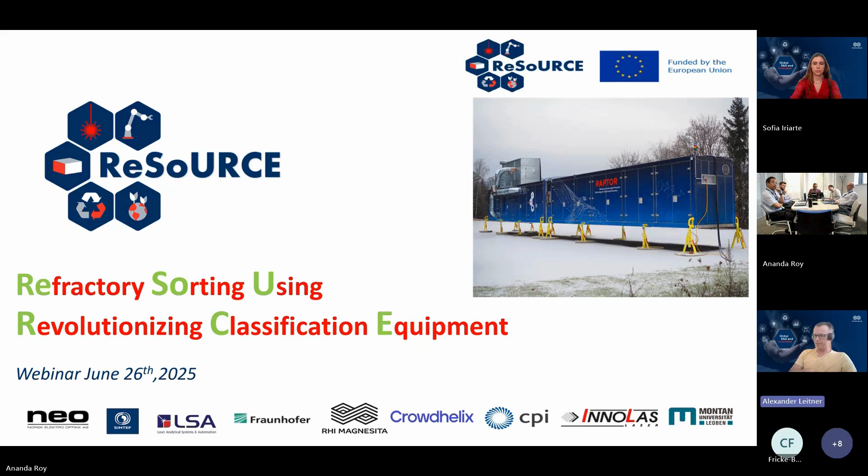Just as a basic idea, what you will gain, we will start with an introduction here. At first, a little bit on refractories themselves, so that you also understand what's actually the origin of the material we are talking about. I would like to show you a little bit the sustainability perspective of how this is impacting society at the end of the day.

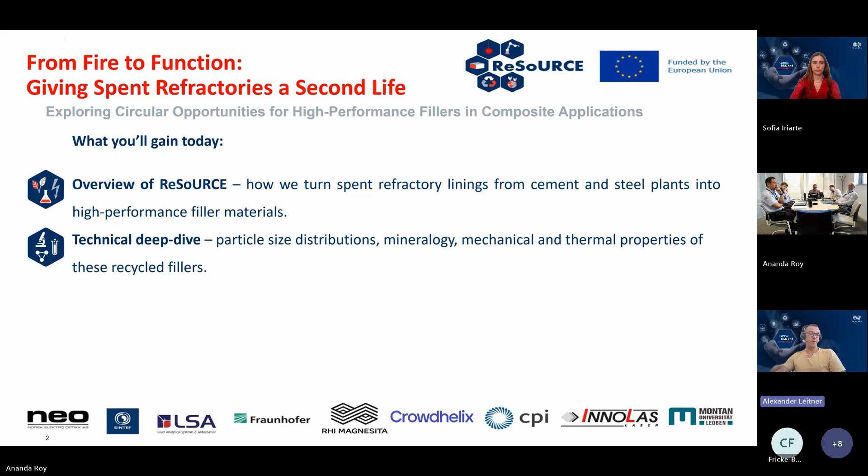Then when we go on, next part will then be done as mentioned by CPI. We will talk a little bit about materials, what are their properties and how have they been characterized. And they will also outline a little bit possible applications we have here within that. So all of that should at the end really serve as a base for potential collaborations.

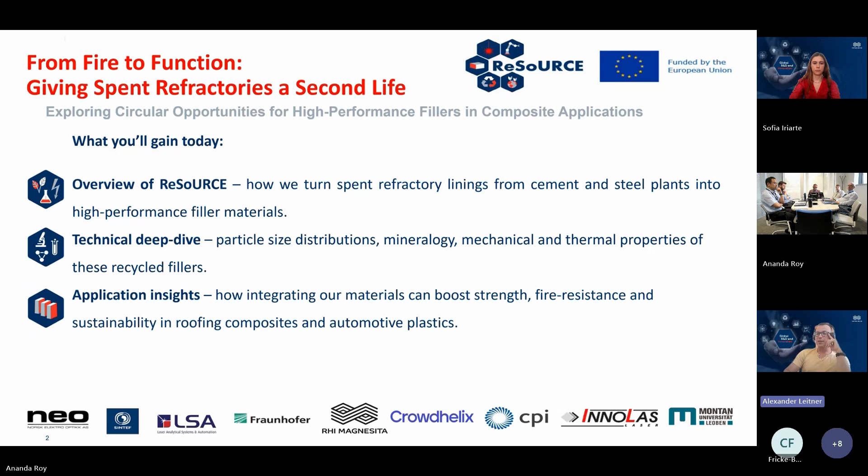But now I think we would like to start with a short interactive session. So we have prepared here a short Menti where we would like to get a little bit deeper into the field of refractories themselves. On the next slide, you are going to see there the QR code, and I'm going to take over control here. There will be 10 questions, I think, and yeah, there will be a small surprise prize also for the winner.

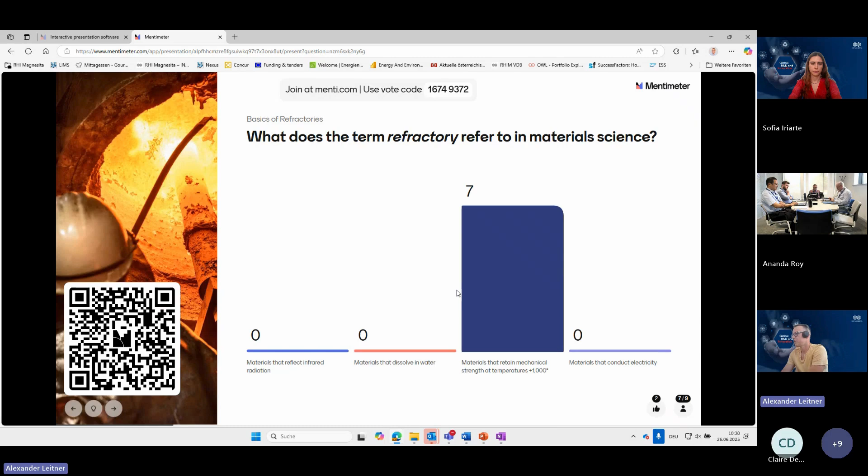Good, then we are going to move on with the next question: which of the following is a critical requirement for a material to qualify as refractory? Is it lightweight structure and UV stability? Is it high electrical conductivity? Is it transparency and low melting point? Or is it the ability to maintain thermal stability and chemical resistance under extreme conditions and temperatures?

So we've now hidden the answer, so it might get a bit harder, not just people selecting the same thing. Let us see what's the correct answer here. It's the ability to maintain thermal stability and chemical resistance under extreme temperature, right? So it's not only about the melting point itself, it also needs to really fit to the customer process, because otherwise it will not serve the purpose of protecting the customer's aggregate against the media which is processed in there.

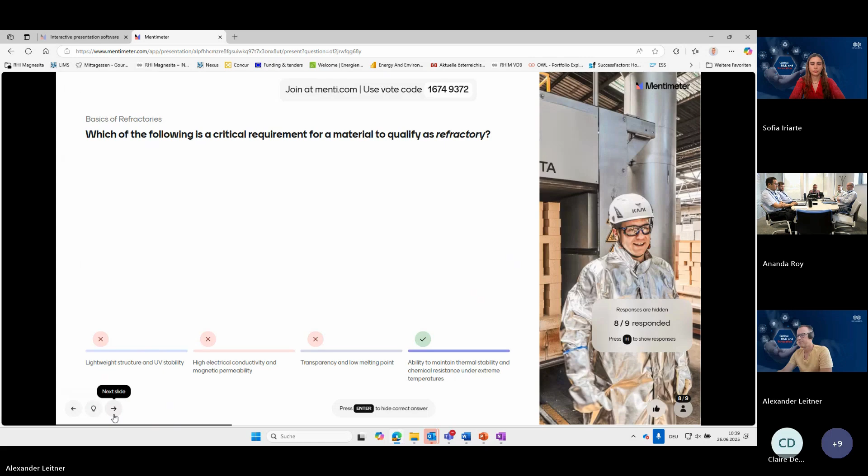Next question: Which of the following materials is not typically used in refractory production? Is it silica, alumina, magnesia, or polyvinyl chloride?

We have 7 answers. Let's see the responses. Two are saying silica, which is not the case. Actually, polyvinyl chloride is the one which cannot resist high temperatures.

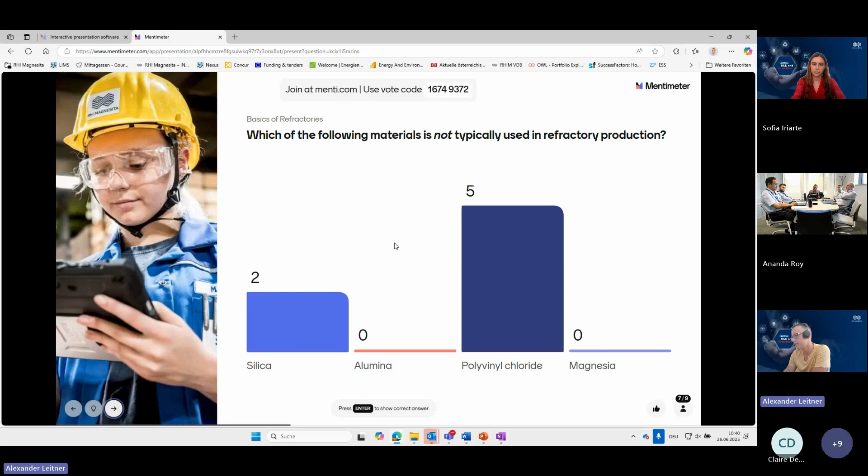Next question: In which of the following industries are refractory materials critical? Is it steel, cement, glass, non-ferrous metallurgy, waste incineration, chemical industry? Or does this rather belong to data centers, wind energy and air conditioning, or to food packaging, agriculture and carbon fiber production, or textile dyeing, petrochemical refining, or furniture coating?

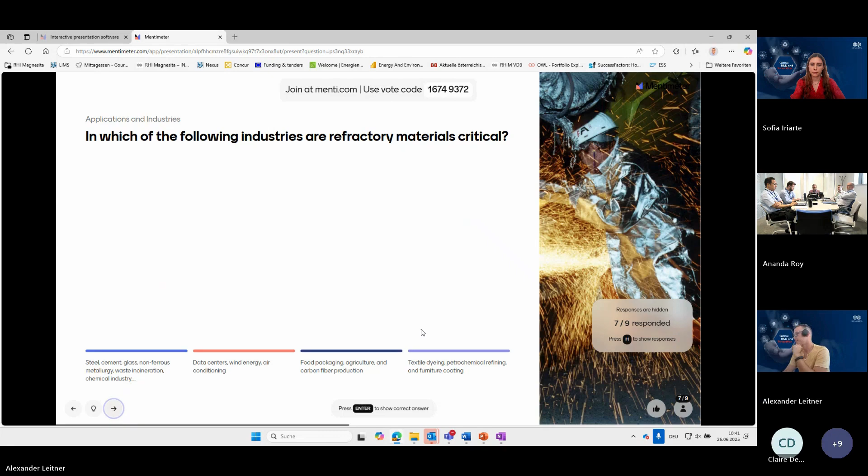People are really quick now. We can see all of you guessed right. It's really related to material production where very high temperatures are used.

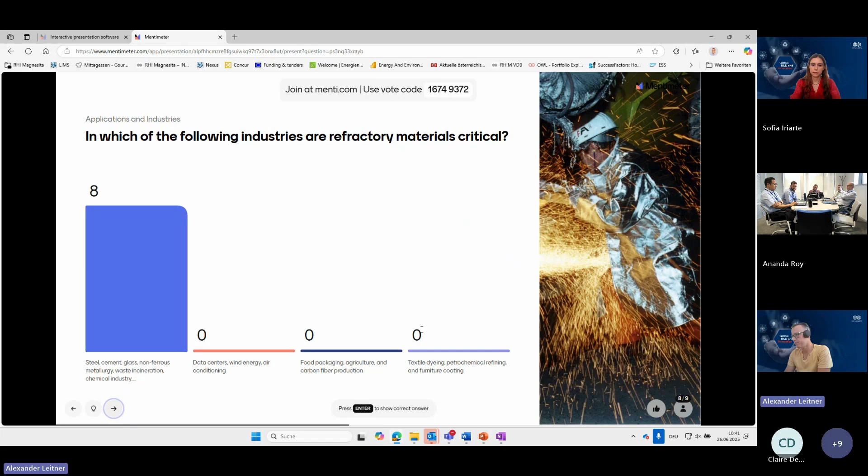Now getting a bit closer to sustainability. What do you think is the average CO2 emission per 1 ton of refractory product produced by RHI Magnesita? Is it 0.16 tons, 1.6 tons, 0.06 tons, or 6.1 tons?

As a reference, the average CO2 footprint of a citizen in Europe is roughly 6 tons per year.

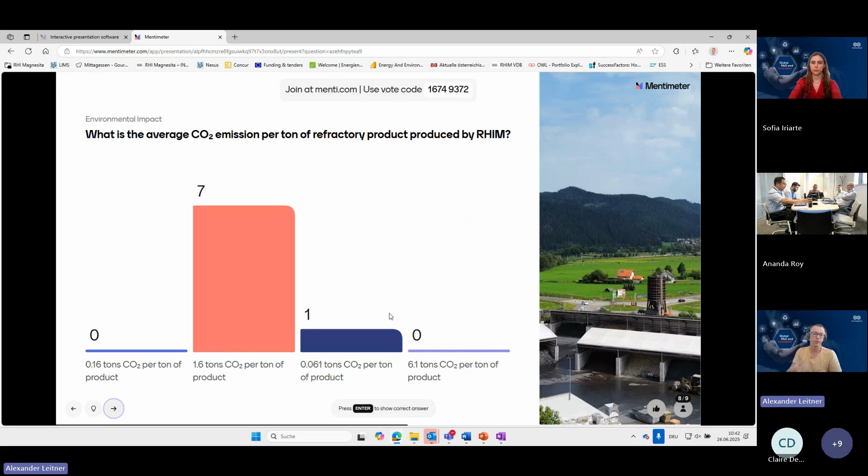We need some more answers. Let's see what's the choice here. That's correct - 7 people chose 1.6 tons per ton of refractory product. So please consider that we are actually producing, in terms of mass, more CO2 than we produce refractory material to be used afterward. This is quite a significant impact.

So where does this come from, why do we have such a large impact? Is the main impact coming from water used during shaping and drying of materials? Is it local transportation from warehouse and raw materials to customer and manufacturing facilities? Are these the fossil fuels used in production? Or is it actually the raw material and the processing, called calcination itself?

We have the responses coming in. That's probably a not-so-known fact - we do use a lot of fossil fuels and need to produce our materials at high temperatures, but indeed, it's actually the calcination of the raw materials.

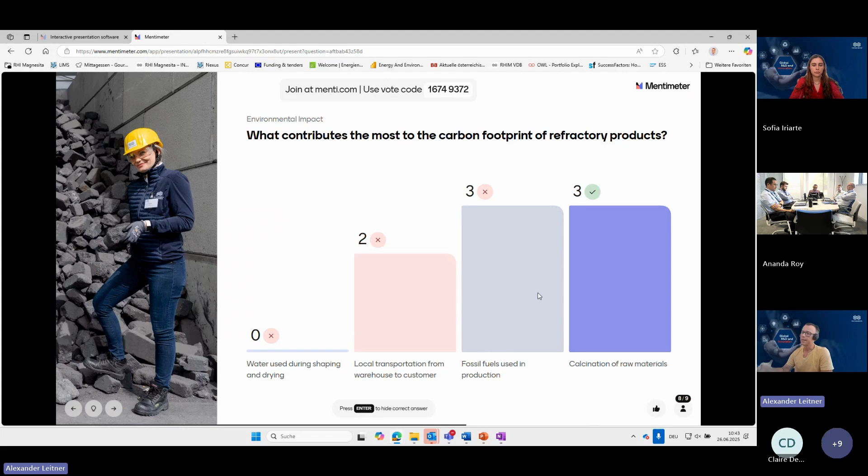That means we usually have carbonates as a raw material, which has intrinsic CO2 stored. So we really have a raw material topic here regarding sustainability.

Two more questions. How much recycling is used in refractory products at the global scale - not just for RHI Magnesita, but globally? Are we using 60% in our products? Are we using 3 to 5%? Are we using around 80%? Or are we using less than 1%?

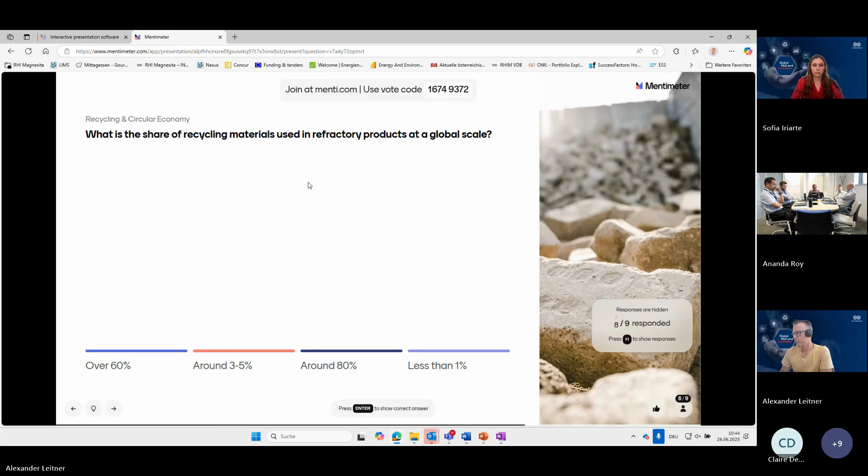Unfortunately, it's not over 60% - that has different reasons which I'll explain a bit later. The correct answer is that on a global scale, only 3 to 5% of this material is recycled, even though it has such a high carbon footprint.

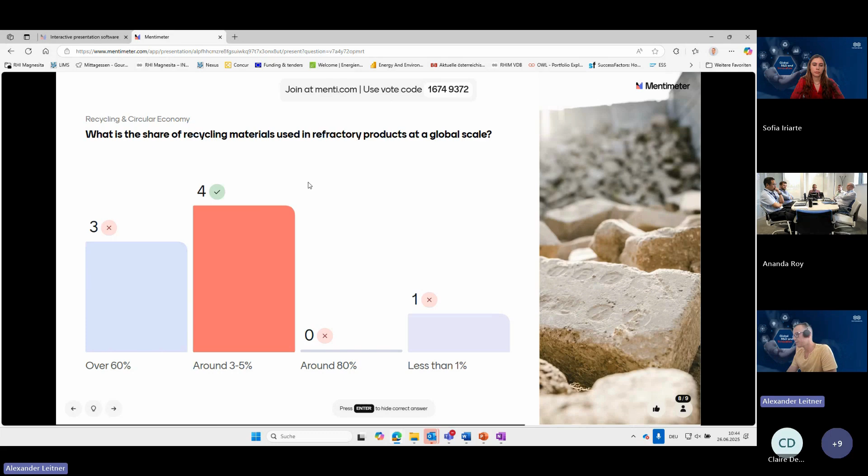At RHI Magnesita, we are very proud that we have a recycling rate close to 15%, so we are really a front runner in this field. However, it's quite challenging to further increase this number, which is something I'd like to show you in the next few slides.

To get an idea of scale: how many tons of spent refractories are generated worldwide each year? It's not easy to get solid numbers, but there are publications out there. Are we talking about 3 million tons, 120 million tons, 28 million tons, or 320,000 tons at the global scale?

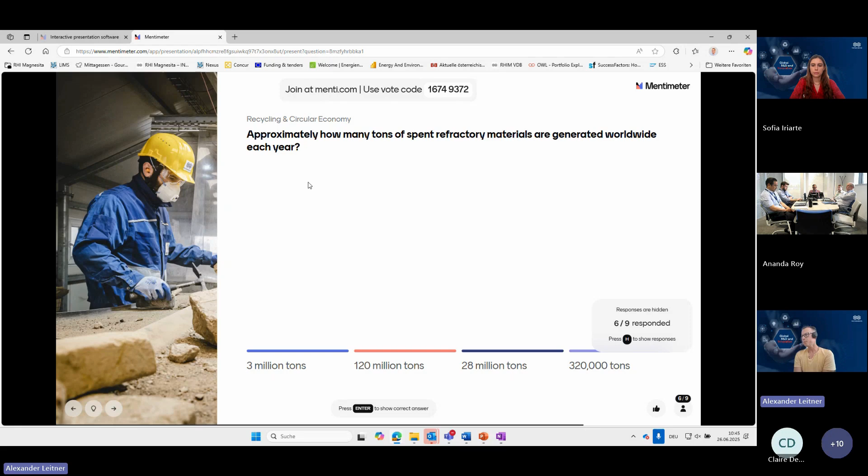Good. Let's see what's the result here. Okay, the right answer is 28 million tons, right?

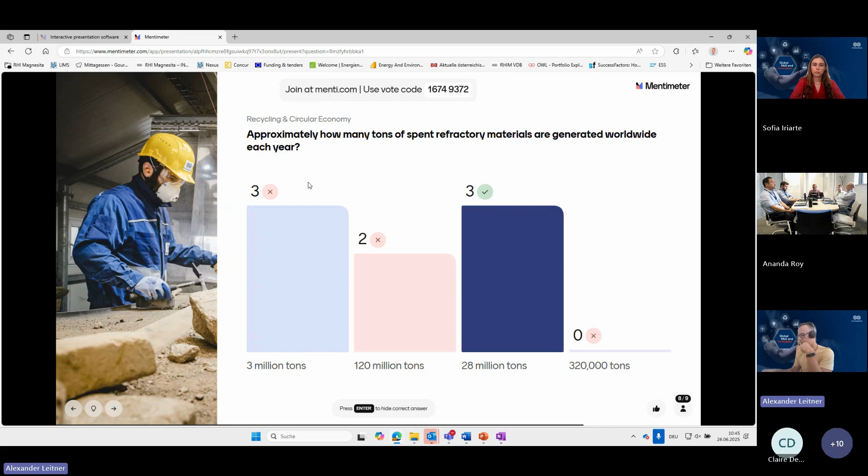So we're talking about a very significant industry in terms of material volumes. There is a lot of material out there, and it's of course also a big issue that not more of this material is recycled in a good way on a global scale.

Good, last but not least, turning a bit to the project. What do you think makes the resource project we are talking about today so unique? Is it building new primary mining infrastructure in Europe? Does it focus on replacing refractories with plastics? Does it export used refractories to landfill sites somewhere abroad? Or does it aim to sort currently unsortable materials?

I think this will be an easy one. Good, waiting for one or two more replies. Well, I think it should be clear, hopefully.

Yeah, it aims to sort currently unsortable materials, right? So that means a lot of these spent refractories out there are, for different reasons, not very easy to reuse. And that's exactly why we need new technology and processes in order to get better here.

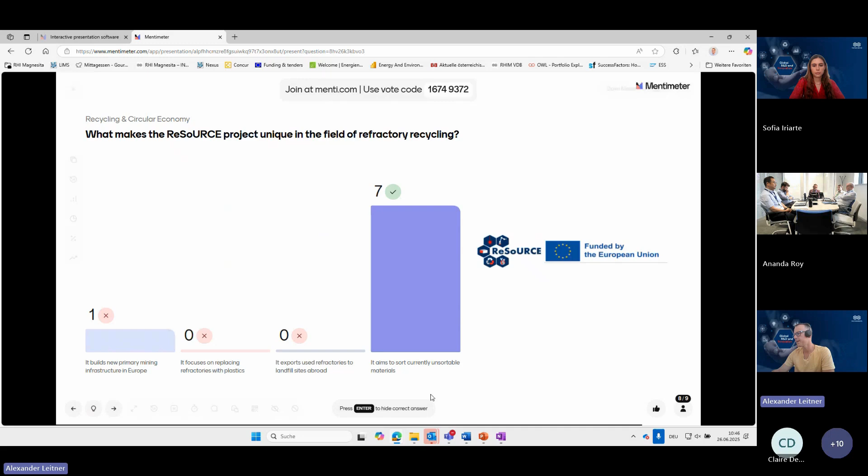Okay, good. Maybe I'm going to switch to this presentation directly now.

And I would like now to give you a bit more context. Regarding the ranking and the prize, I will come back to you at the end of the presentation because I can now see in the results who got most of the right answers.

Okay, can you see my screen? I hope it should work. Okay, yeah, I already talked a little bit about refractories, right?

Those are really materials which are protecting customer processes where we need very high temperatures, right? So for you to get a basic idea of where refractories are used: for instance, the steel industry. Per ton of steel, we also need to use 10 to 15 kilograms of refractories. But it's also about copper industry, concrete production, cement production - more in relation to steel production, glass, aluminium. So I think with almost all materials you're in touch with every day, refractories are one of the very essential parts needed to be produced.

For that, we use three main raw materials, I would say. The first one is MgO with a high melting point of roughly 2800 degrees C. Then for lower melting point applications, we also have alumina, which is close to 2000 degrees C, and then silica more in the range of 1500 degrees C.

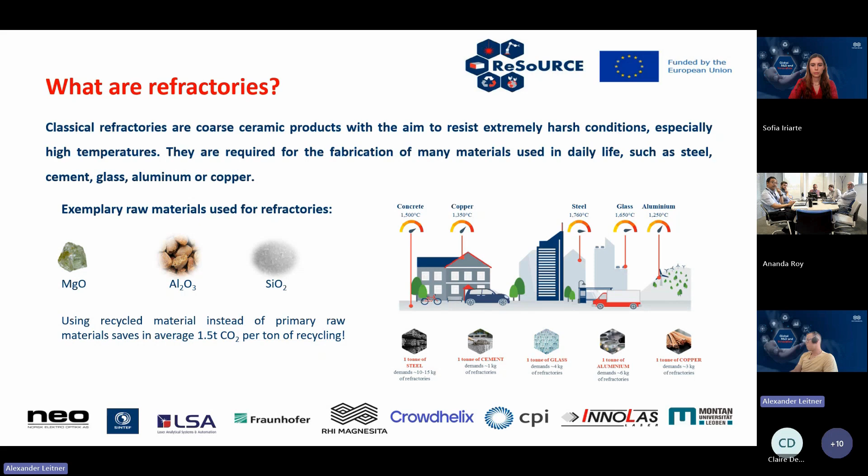However, the refractory world is quite complex, I would say. We have very different product solutions. Here on the right-hand side, you see an overview of the material systems we are using, right? So usually we are not using just pure systems with one raw material, but also products where we are mixing different constituents. This can either be produced as a brick.

Yeah, it's a bit like building a house. You have certain bricks you put on top of each other in a certain aggregate, classical bricklaying. We also have products called monolithics and precast, which is more similar to concrete, right? We have mixes delivered on site to the customer that will be mixed with water or other solutions and can then be hardened on site at the customer and dried.

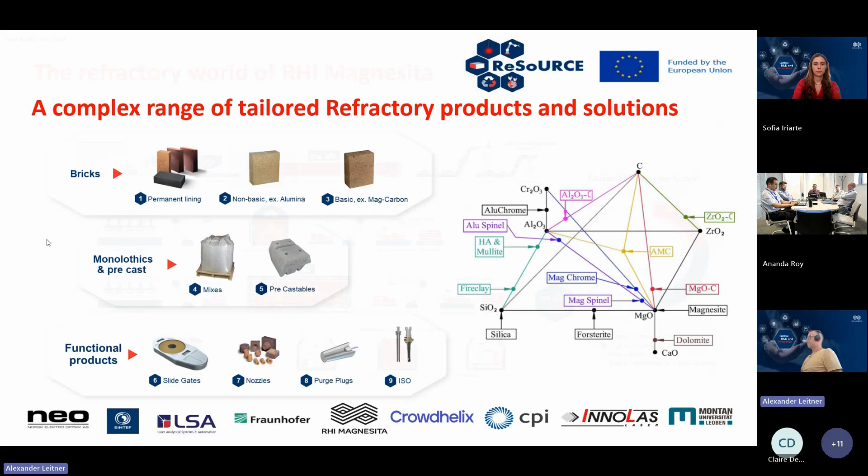We can also precast that, and then we also have a couple of products which are called functional products, meaning they're not just there for resisting these very harsh conditions, but also have a very active functional purpose. For instance, controlling the flow of a steel ladle, or purging. But the take-home message here is that it's quite complex, and we have a lot of different materials.

That's just a little bit highlighting again where actually we are having our high carbon footprint, right? One of the main raw materials used, I mentioned, is magnesium oxide, and what's mined is magnesium carbonate. So that means if you would like to produce MgO, you need to heat that at a very high temperature, and you will release CO2, which comes out of this so-called raw material magnesite. Yeah, and very hard to prevent.

However, of course, if you go through the full circle here - your product is used within the customer process, and it's then getting recycled - we are not entering the primary raw material production cycle anymore, right? So we really get rid of the CO2 emissions we have during calcination, and that's exactly the reason why we have this very high benefit in terms of CO2 savings when recycling is used.

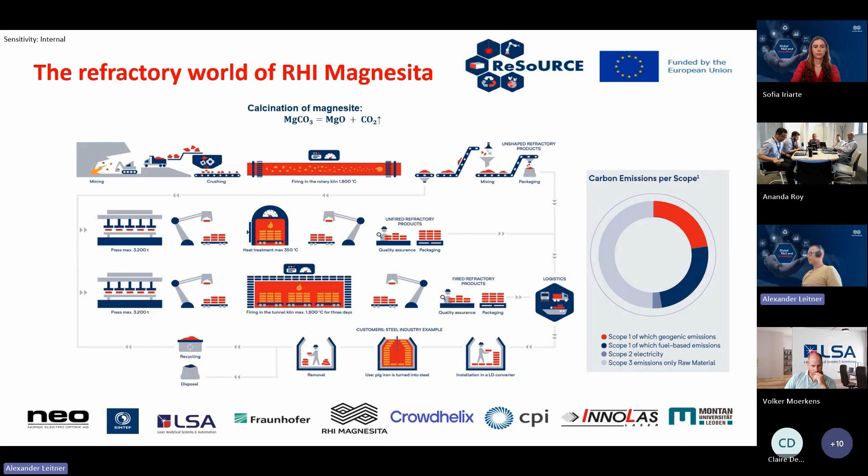So I think we can agree that recycling is a very nice thing, but why is it so difficult now for refractories? What you can see here on the left-hand side is the aggregate used in steel production. It's a blast oxygen furnace lined with material which, from an optical point of view, looks quite similar. However, if we look inside, you see a lot of different colors referring to different products and different product qualities, meaning they might have different chemistry and so on.

And this is really needed because inside of this aggregate we have very different areas in terms of the conditions they have to withstand. There can be some impact here, it can be more aggressive in the slag zone, and so on.

What happens after service is that all of these products usually get mixed up, as you can see here, because it needs to be a fast process happening in the environment of a steel plant. It's not really possible to take them out brick by brick. So what you end up with is this big pile of unsorted material, which on top doesn't look like what it looked like when we put it in there.

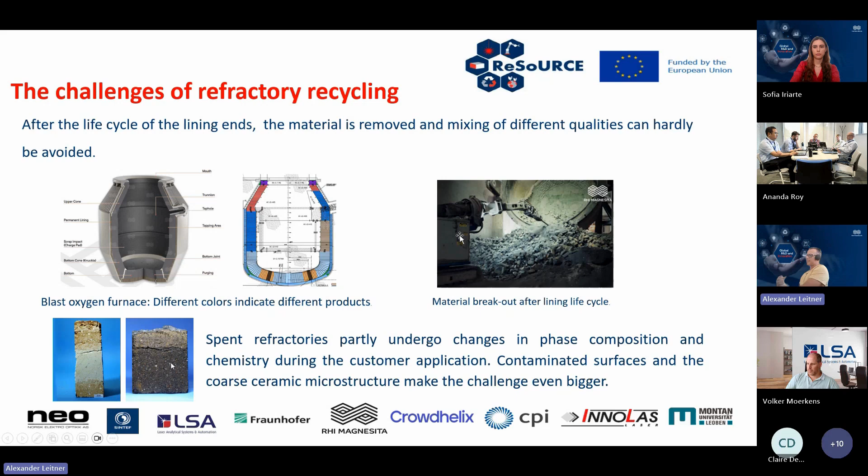There will be some infiltration, some impact from the customer process and so on, so it's actually a very diverse pool of materials we are getting back. So how can we overcome that now?

I think it's very essential for us that we are able to really automate sensor-based sorting, and there are several reasons for this.

Nowadays, still the state of the art across all regions in the world is actually hand sorting. That means there are really people on a conveyor belt looking at the bricks and judging different characteristics - can be visual, can also be a bit about the shapes of the edges, for instance, and other features. So they're making a lot of decisions every day, but it's not really recorded what these decisions are based on, because it's really a sum of a lot of different characteristics they're looking at. Now, of course, with automated sensor-based sorting, we allow for gathering much more data.

So what we are currently doing is combining laser-induced breakdown spectroscopy - that's one part of the process where we have a laser shooting on the material. You will see a spark emerging like here, and from the color of the spark we can learn a lot about the elemental chemistry.

We're also adding hyperspectral imaging - that's a very specific camera which gives us more of a clue about mineral phases and mineral phase composition of the material. And with a lot of data received from both of them, we apply artificial intelligence algorithms to have a really optimized solution.

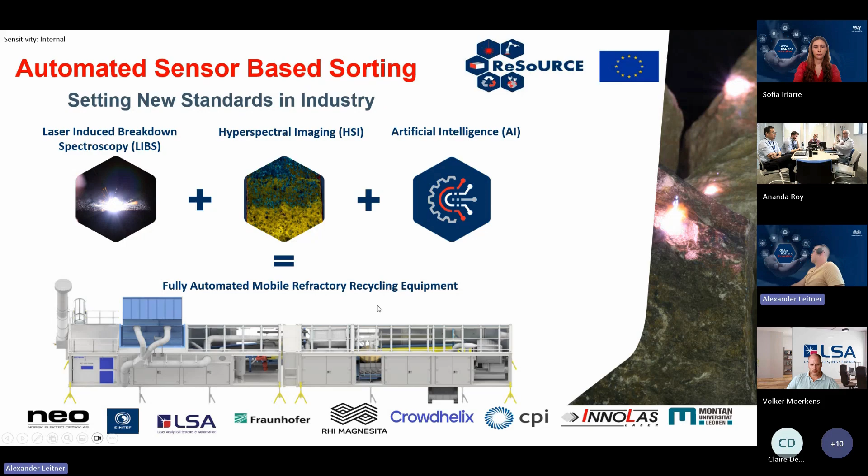And that's what we call our Raptor - this is the fully automated refractory recycling equipment. Just to show you a little bit what it's looking like, here are short image videos of our project.

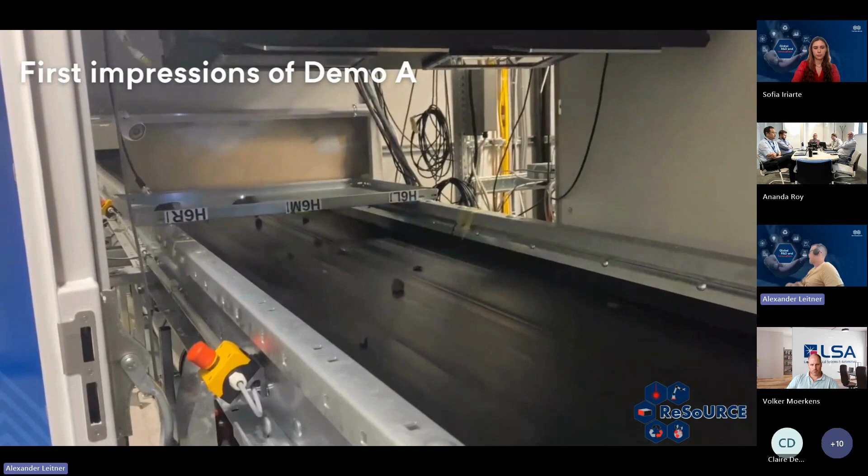You will see here the different spent refractories on the belt, which are measured by the laser. This is a very fast measurement, which is important because we have high volumes to sort and produce.

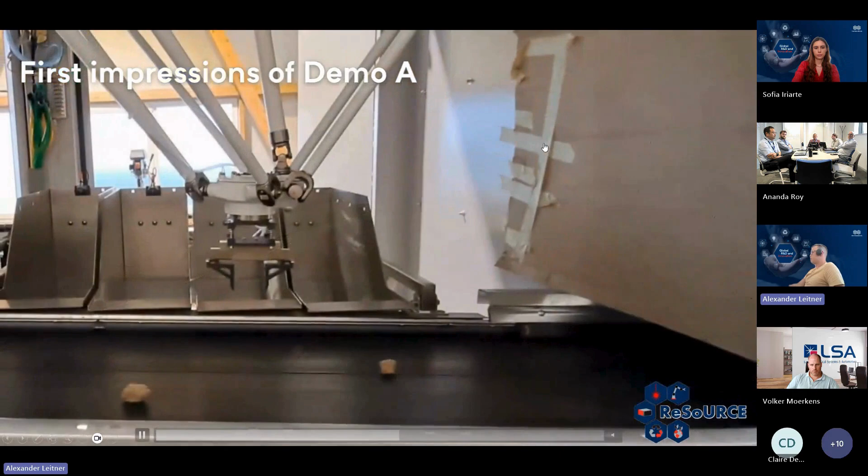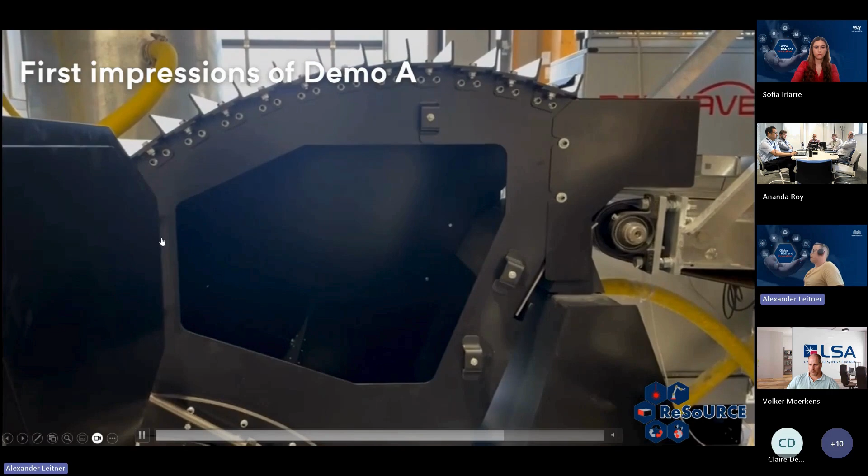So the information from the spark gets into the computer, it's measured by the hyperspectral imaging camera, and then we can either use pick and place robots to put the material into up to 8 different classes, or at the end, especially for small particles, there's also the possibility to differentiate them into different sorting classes by air rejection.

That's a bit of a glimpse of this machine, which is now already up and running in one of our recycling centers. And I would say with really fully changing this process, one thing is, of course, that we are not just receiving the very same material streams as we used to with manual sorting.

So that means we are coming up here with new materials, but also with some streams which might not be directly reusable in the refractory industry anymore. That's actually where our partner here, CPI, comes in.

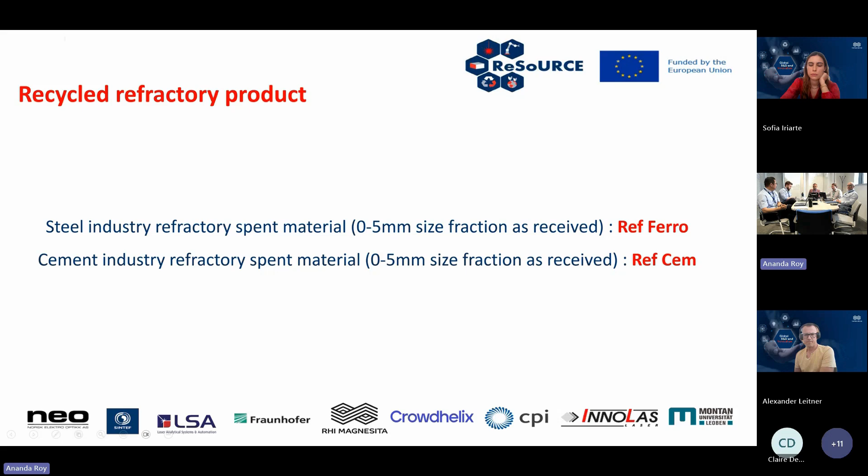So, as Ananda mentioned, these materials are spent refractory materials. The first thing that we decided to do was undertake a characterization of what these materials are and how they behave.

So we started by looking at the chemical composition of these materials, using a range of our different techniques. We looked at XRD, FTIR, EDX, and Raman, where we can really look at what phases are present, what bonds are present, and what elements are present in these materials.

We have a typical composition of the brick class for both the Ref Cem material and the RefFerro material. They differ slightly: the Ref Cem material has got slightly more calcium species in it, whilst the RefFerro material is a bit simpler with magnesium oxide, graphite, and spinel. Generally, across our different characterization techniques, we see the materials present that we would expect from the initial composition of the brick class.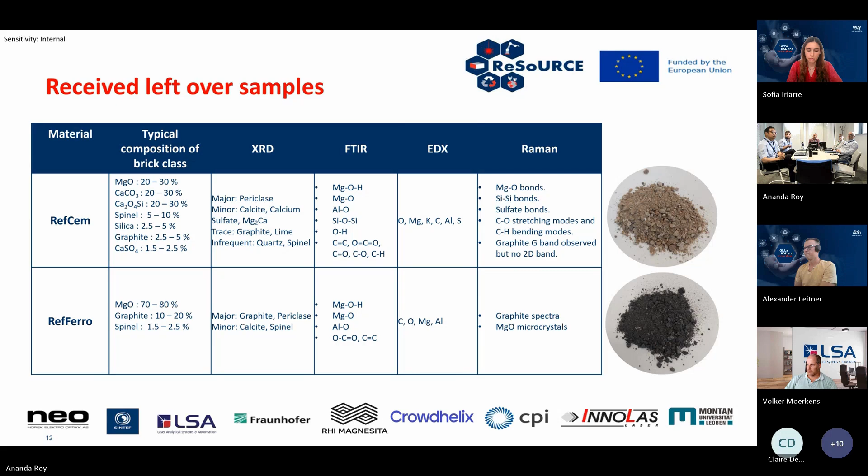We then had a look at the particle size distribution and the density of these materials. Although they are 0 to 5 millimeter size fraction, we didn't know how the particle size distribution would vary across that range. We actually see that both of these materials have a bimodal size distribution, with size classes dominant at around 53 to 200 microns and 1700 to 3,550 microns.

The bulk density of both materials is fairly similar: 1.7 for the RefCem material and 1.6 for the RefFerro material. The skeletal densities are then 3.2 for the RefCem material and 3.1 for the RefFerro material. The difference in the bulk density and the skeletal density is due to the voids that are present when you measure the bulk density.

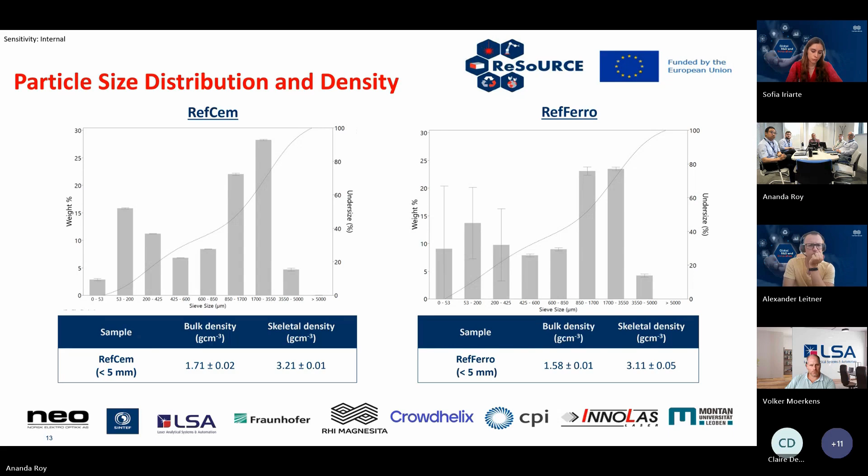We also had a look at the physical characteristics of these materials, whether or not they have interesting magnetic properties, dielectric properties, electrical properties, and thermal conductivity properties. What we see is that the RefCem material behaves as a dielectric and an electrical insulator, whilst the RefFerro material behaves as an inductor and an electrical conductor material. The reason is that there's a higher amount of graphite present in the RefFerro material, so we can form conductive pathways to create that electrical conductivity. Both materials are also thermal insulators, which is what we'd expect given the applications these materials have been used in.

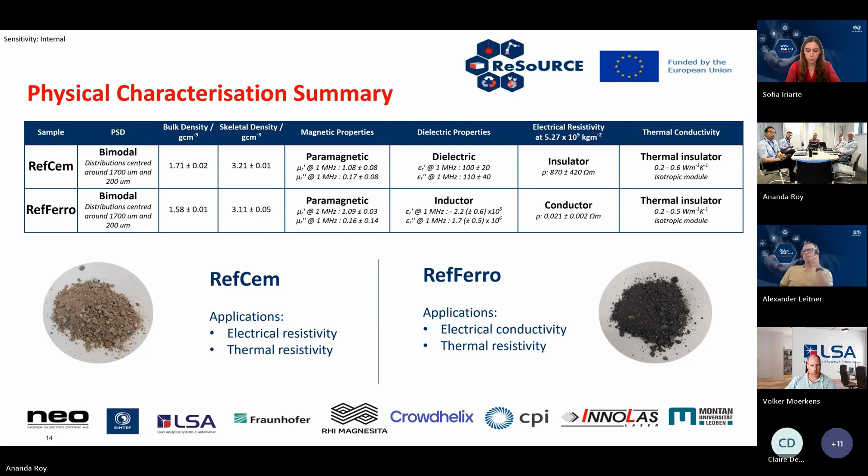So the materials were of a 0 to 5 millimeter size class, and we realized that for certain applications we might need to do some processing and change the size class of these materials to an appropriate size. A lot of the applications we've looked at are using these materials in polymer composites, where we need a D50 that's below 10 microns.

To achieve that, we did some milling. We did lab scale milling, looking at a 20 gram scale, and then we upscaled this to a multi-kilogram scale. We managed to achieve D90 below 10 microns. But due to how we process these materials, since we do a wet milling process, we see some change of the materials from magnesium oxide to magnesium hydroxide.

We get some slight changes in the properties of the materials with this change, so a slight reduction in the skeletal density. But actually, magnesium hydroxide is potentially quite an interesting material for fire retardant properties.

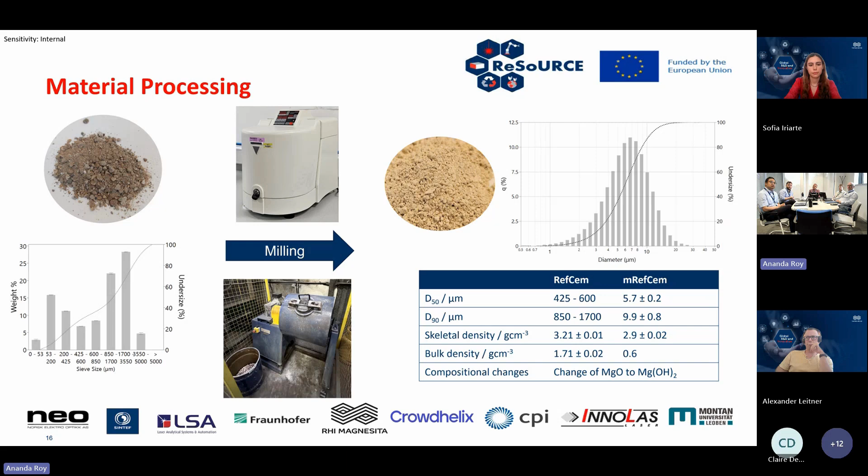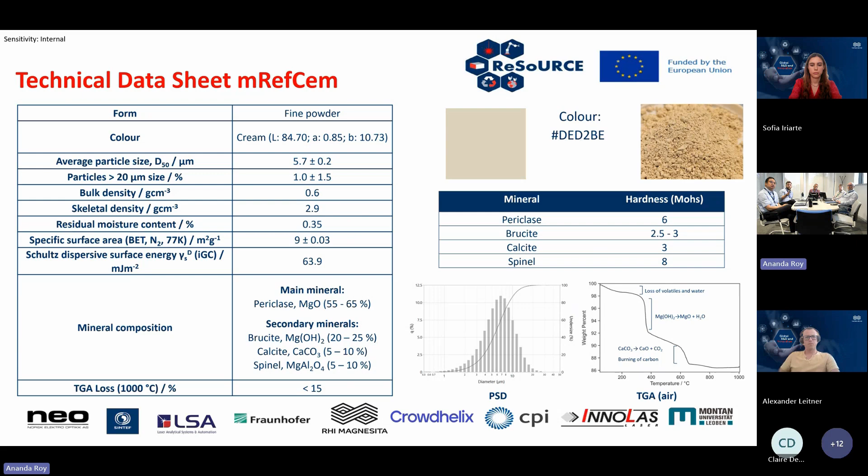We then characterized these milled materials and produced material passports for both of them. We again looked at the particle size distribution, the densities, the surface area, and the surface energy of these materials. We have the mRefCem, which is a nice cream color, and the mRefFerro, which is a gray color. Both of these material passports are available on the ReSoURCE project website.

Both of these materials have a reasonably high surface energy, so we can also modify the surfaces to enable better integration into whatever application we want to use these materials in. The model surface modification we've looked at here uses silanes to treat the surface of the material.

We can create certain functional groups on the material surface that allow it to react into whatever network we want. For instance, here we've looked at treating the material with a silane called Glymo, which has an epoxy group on it, so it allows it to react well into epoxy systems.

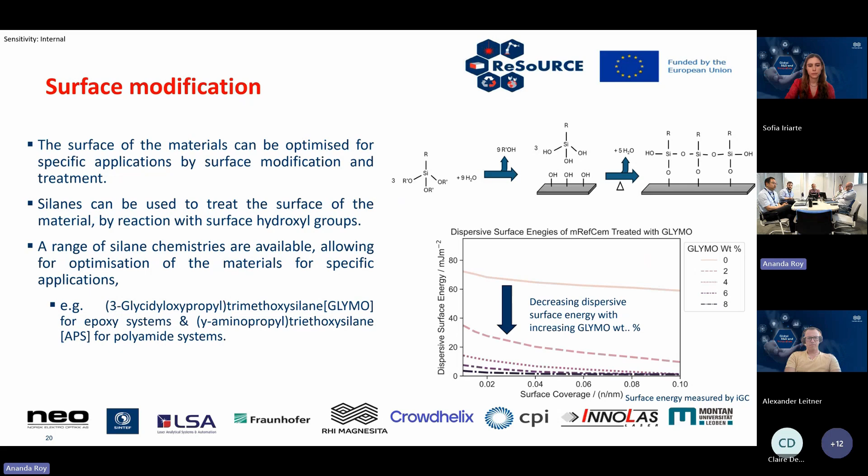We can see that we can modify the surface energy of the materials here by changing the amount of Glymo that we've used to modify the surface. But whether or not we need to modify the surface really depends on the exact application that we're looking at.

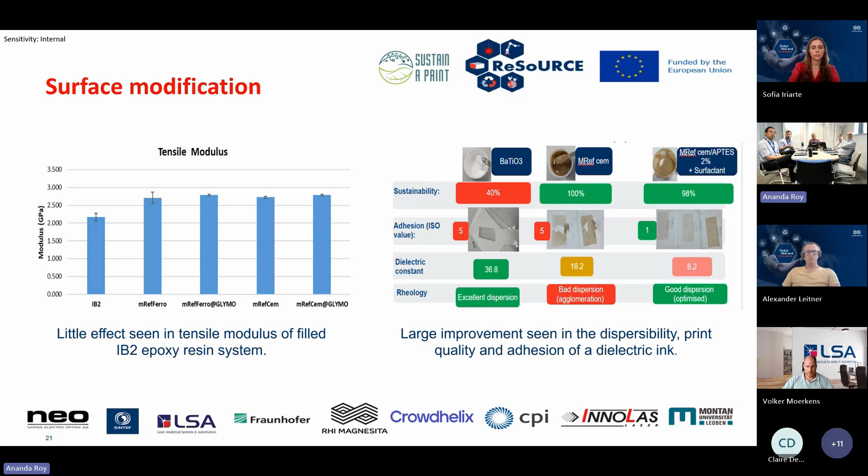We have an example here on the left where we're putting it into an epoxy system, and really the treatment of the surface makes very little difference. Whereas on the right, we have an application where we've put this into a dielectric ink, and actually the treatment of the materials really does improve the properties compared to the untreated materials.

I'll now pass on to my colleague Hugo, who will talk in more detail about some of the applications we've looked at. Thank you, Jack.

So just to recap on that, on the theme of application, what my colleague presented was the foundational work for the potential application space for this material. Ideally, as Ananda also mentioned, we would probably like to use this material in its received form, with the hope of maintaining control and desired performance outcomes, but that's not possible.

To ensure consistent results, that's what Jack has also mentioned, including the material passport and establishing those standard preparation protocols, but also the importance of surface treatments according to how you can get this material's functionality for specific applications. So in the next set of slides, what I'll try to showcase is the performance of this material and also assess its suitability and validity across different scenarios of these applications.

Starting with the burning test of these materials, which we used as a standard within a standard epoxy. As global fire regulations continue to tighten up, there's a growing demand for these non-halogenated or low toxicity flame retardants. Refractory materials can withstand extremely high temperatures, which makes them potential candidates as functional fillers to perform within fire-safe polymer composites.

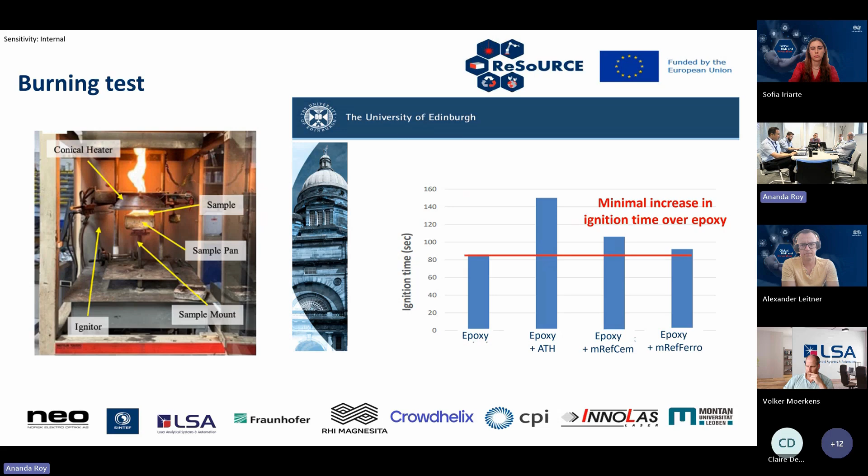But where the advantage of these waste fillers lies is within the HRR, or heat release rate, and the toxic gas release. The epoxy system has a very high and sustained heat release rate, and ATH has similar properties. But with the mRefCem and mRefFerro composites, you can see a sustained reduction in peak heat release, indicating that suppression of the combustion reaction is taking place.

These materials also act more as a physical barrier for toxic gases such as carbon monoxide and carbon dioxide, showing similar behavior to the epoxy and ATH. The amount of CO and CO2 release within the mRefCem and mRefFerro is much lower, which is quite advantageous within construction materials. This helps delay the spread of fire, which is critical for evacuation and firefighting, and also reduces harmful gas release during burning.

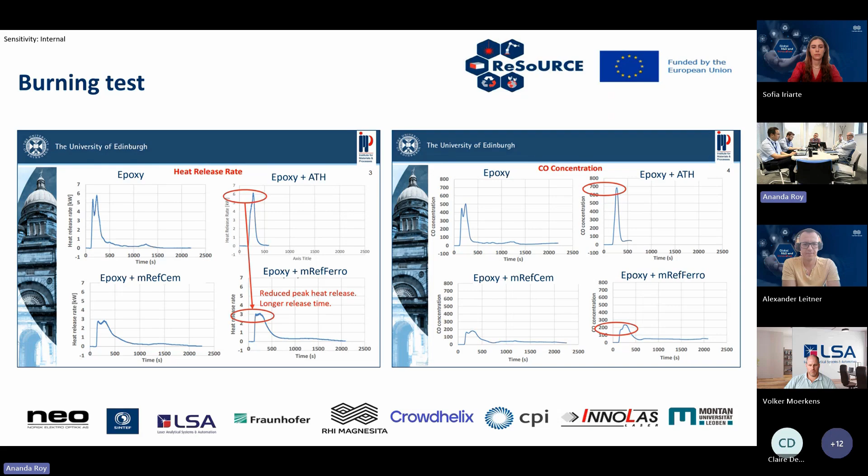Now I'd like to move on to more complex situations in terms of polymer composites, especially looking into applications within thermoset and thermoplastic composites. There is a wide range of thermoplastics and thermosets in industry, and they are very attractive due to their diverse properties. The use of fillers is well established and well understood in this field. What we'll try to do now is look at the effect of these fillers within thermoset and thermoplastic materials, and compare their effectiveness to conventional benchmark fillers.

So firstly, we'd like to start with the epoxy-based thermoset composite, looking into the functionality of these fillers within epoxy composites, especially their thermomechanical, thermal and electrical properties. As you can see in this slide, the enhancement, especially in storage modulus, is quite higher in terms of calcite in the first graph, and it outperforms both the untreated and surface-treated MREF-based fillers. But the advantage of this depends on the application and what is required within the thermoset context.

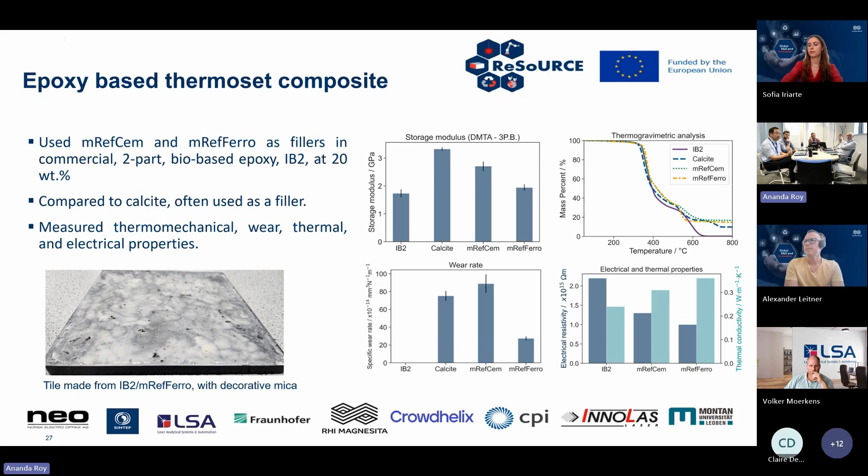Now moving on to thermoplastic-based composites. There is a whole wide range you can use, but we have focused on high density polyethylene and polypropylene within these thermoplastic ranges, and we have tried to identify the optimal filler loadings, looking into stability and thermal performance.

Firstly, looking into virgin high density polyethylene, there's a lot of work we've done over this period, and depending on the nature of the material, this depends on the application purpose. With the TGA, it's substantial to see a trend of increasing residue with higher filler content, observed with all the fillers. The MREF-Ferro especially shows a very high inorganic content, meaning it has much better, higher thermal stability.

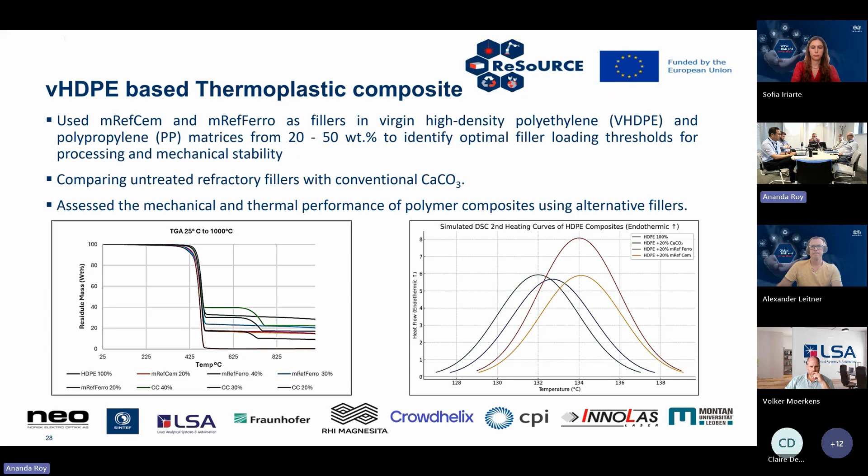On the right-hand side, you can see the DSC, or thermal behavior, of these materials within high-density polyethylene. There's an increase in both melting and crystallization temperature, especially for the MREF-Ferro material, indicating it's a promising candidate for applications requiring high stiffness, dimensional stability, or thermal resistance. But with the inclusion of calcium carbonate and mRefCem, minimal influence can be observed within the thermal transition.

Moving further, looking into the mechanical thermal analysis of this material within a different temperature sweep, especially we looked into the storage modulus on different temperature regimes. One of the trends that we can observe is that with increasing temperature, the storage modulus decreases.

This is very typical of thermoplastic behavior. Basically, with increasing temperature, you can see the softening and reduction in mechanical rigidity. But you can see with the inclusion of these fillers within the system that, especially with increasing filler loading, there is an increase in stability.

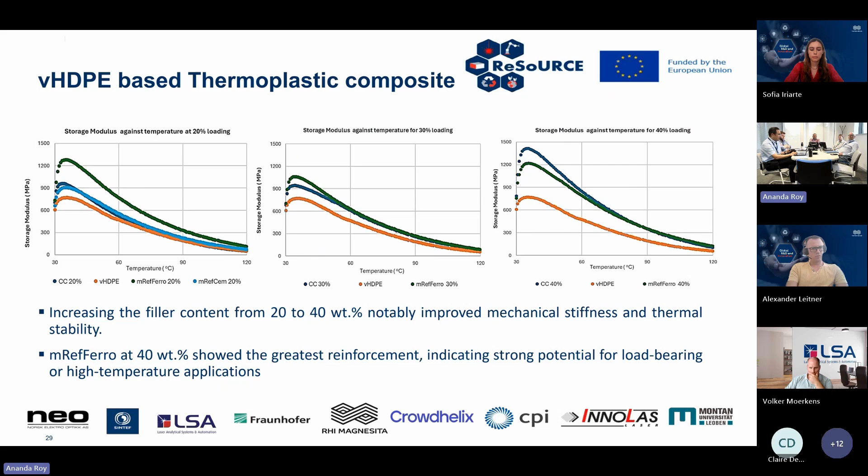With up to 40% loading, the storage modulus is much higher, especially for the MREF ferro material system. Therefore, all of the systems evaluated state that MREF ferro provides a much more significant reinforcement within this polymer system of high-density polyethylene, making it a very strong candidate for applications requiring enhanced load-bearing capacity or performance under elevated temperatures.

Last but not least, within the polypropylene system, we tried to include these fillers and see their performance again within the same structure of mechanical and thermal testing. As you can see with the viscosity graph, it's quite substantial that MREF ferro especially shows a very sharp increase in viscosity, almost 3 times the other fillers within the system.

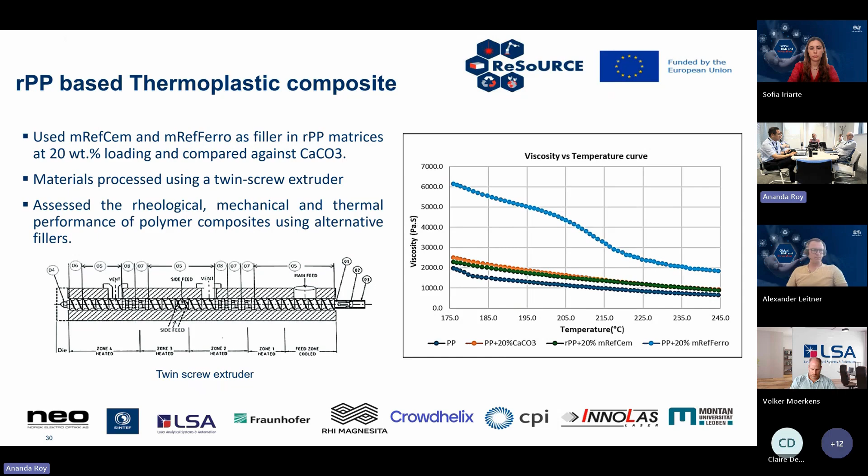The pronounced rheological reference of the MREF ferro filled composite highlights that its potential as a reinforcement agent is again very high, with higher melt strength and dimensional stability, which is required within the polypropylene system. So it enhances those systems within the polypropylene composites.

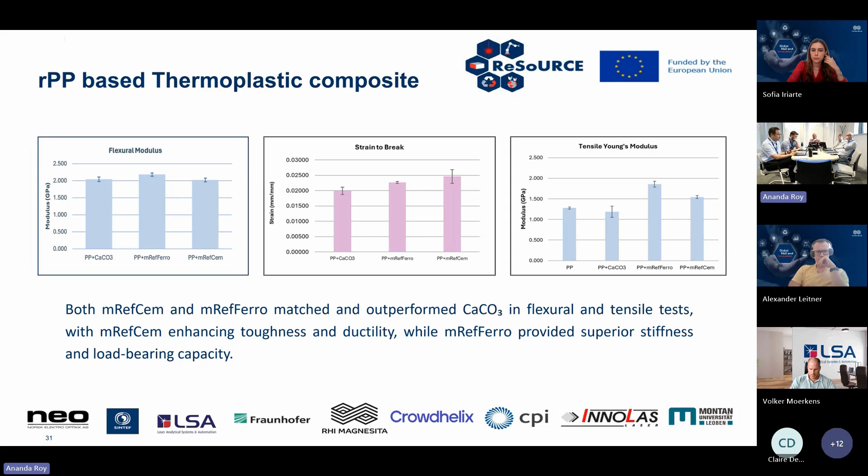There was a lot to cover within the application base, but we have only reached out to what we thought was appropriate within the system. As a conclusion, you can see that mRefFerro and mRefCem within the commercial epoxy base show reasonable properties for replacing the standard filler of calcite, showing that comparability.

Furthermore, mRefFerro makes the composite much stronger and more heat resistant, which is ideal for tough, long-lasting products. mRefCem has a good mix of strength and flexibility, and is much easier to process during manufacturing of these polymer systems. But both of them are as good or even better than the regular filler of calcium carbonate, which is proven within this study we have undertaken.

So basically using these recycled fillers to help reduce waste, cut carbon emissions, and support the circular economy stands out very pleasantly within these systems, and gives further opportunity to look into more specific applications that could be considered with the use of this material. It also shows a very promising way to turn industrial waste into valuable new materials.

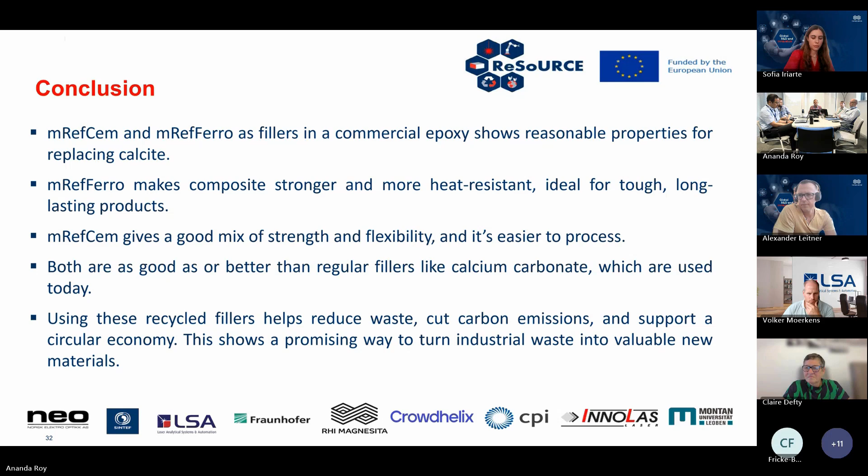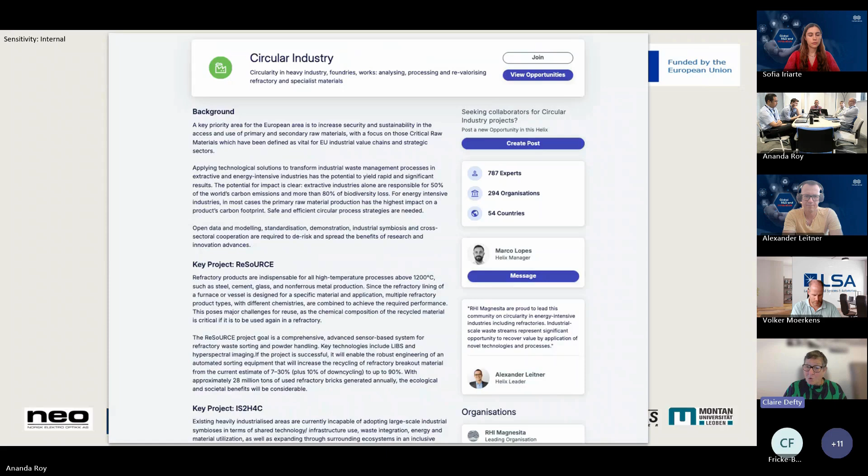So in conclusion, there's lots of different product applications we can use. CPI, as part of our close-out of the project, will look at trying to give technical support. So don't think, I wonder if it would work, I'm not sure if it would work for my application or my product - the technical team can support you by looking at the characterization of your material with this material as a filler. We can look at the theoretical performance, and we can do some mechanical testing of properties. So there's a whole myriad of capabilities, whilst this project is still running, that we can give you to support the barriers to use of the material.